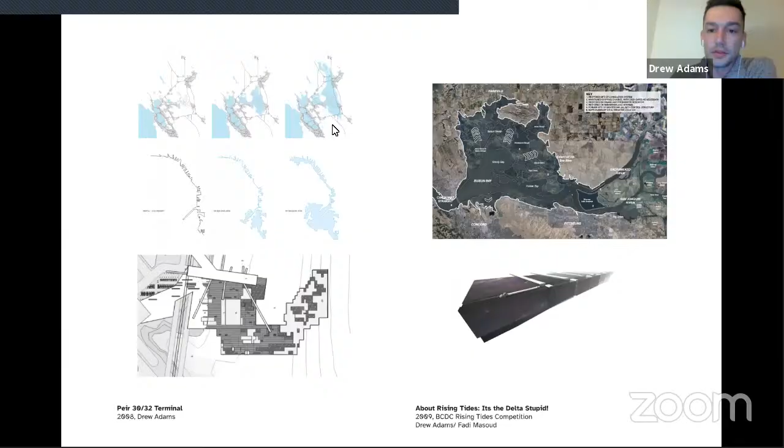This was one of a series of projects like this where work was happening in studio, and either in collaboration or independently, I was looking at leveraging these to keep exploring these ideas and use competitions to push development of graphic skills and skills working on project narratives. This work, to my surprise, quickly started getting published and didn't hurt in terms of getting summer jobs.

What was also something that stood out is at the time, Ian Chodikoff, then editor of Canadian Architect, had remarked during a presentation he was giving that often the editors and writers of these publications were looking for things to write about, and he had encouraged us to write out.

A number of these publications and others resulted from that, including the one in the middle where I had written to Christopher Hume of the Toronto Star, challenging a few things he wrote about the ability to fix the suburbs. I found myself 2 days later on the receiving end of a phone call from him, and 2 days after that, with some of my work in the Star, and a lesson to be much more prepared if I'm going to write someone like that, to be able to answer questions on the spot and continue to substantiate my positions.

This lecture by Cameron Sinclair, editor of Architecture for Humanity, while I was a student, founder of Architecture for Humanity and editor of the book Design Like You Give a Damn, left a fairly significant imprint on me. He delivered it at OCAD on when being sustainable is a matter of survival.

This lecture happened at the time the housing market was collapsing in the US, followed by the global recession. I spent the next several semesters at Daniels co-opting my studio assignments to focus them towards my own interests, building up to my thesis looking at the suburbs, zoning, and low-rise high-density housing typologies. Sorry for these things jumping on the screen, it's the Zoom controls popping in.

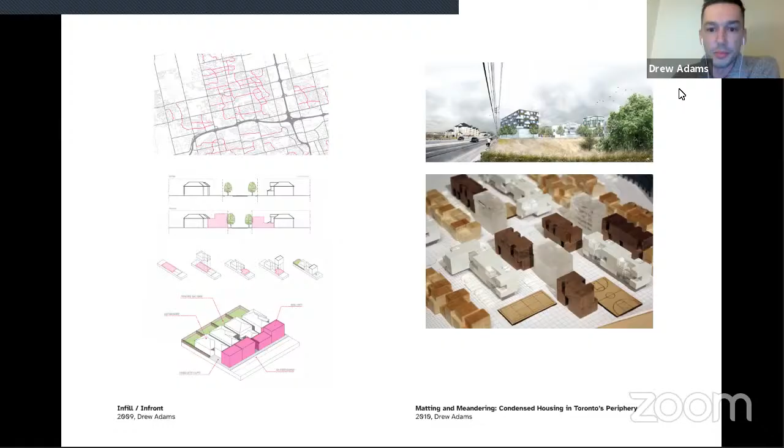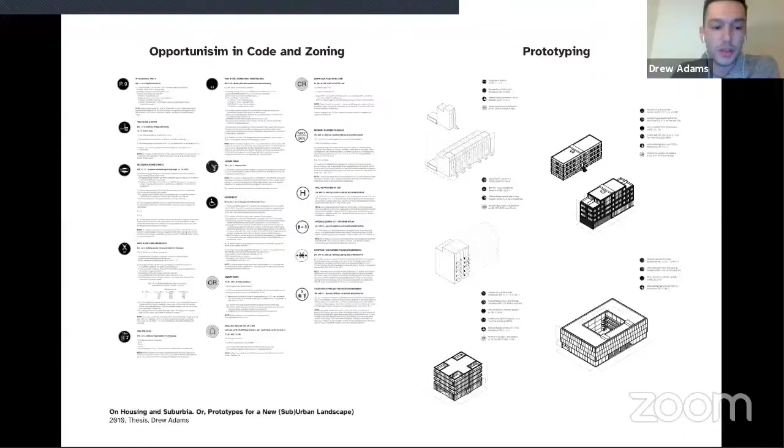This work in studio started to feed into my thesis work, looking at opportunism in the zoning and building codes to inform development of a series of loopholes, essentially, to inform development of a series of housing prototypes targeting areas of the city often cast aside as undevelopable for lack of sufficient performance. On the left, working on proof of concepts. On the right, starting to deploy these along my 6-kilometer long thesis site.

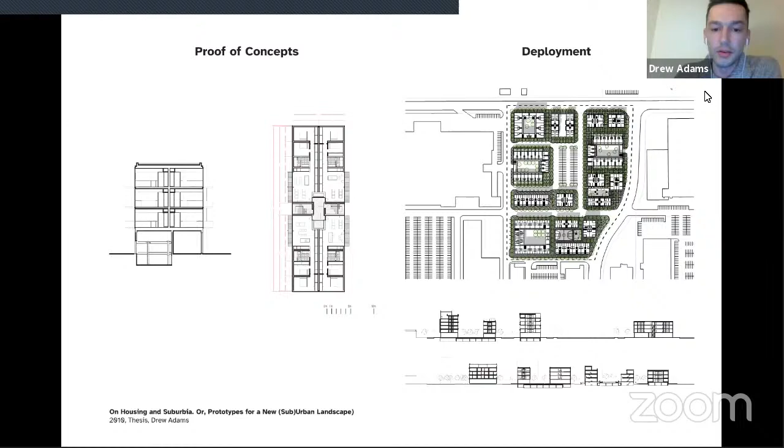It was a corridor site, so along it and adjacent to it, scaling that up to the regional scale of the Toronto area, looking specifically at these pink areas and essentially everything outside of the downtown core, but these pink areas specifically as sites for low-rise high-density intensification.

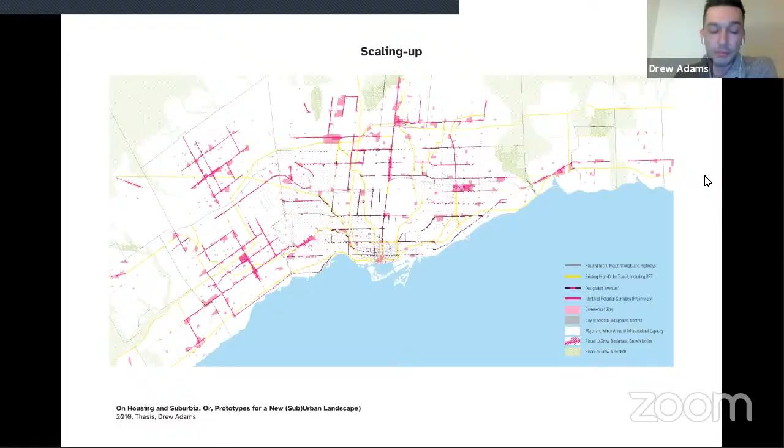In doing this work, what I was able to project and forecast at the densities through testing was that you could build out all of these sites and accommodate all the future projected population growth at the time for Ontario and Places to Grow without building anything more than a 6-story building, recognizing that we're still going to build condos like we always do at the same time.

After graduating Daniels, I joined Baird Sampson Neuert Architects, worked on quite a number of different projects, but in particular, this one on the left is one that left a mark on me.

It is a demonstration, a carbon neutral demonstration housing project in Yellowknife that we did a big design report on. I had the opportunity to fly up a few times.

And while working that, I was simultaneously working with a few friends on this competition entry on the right for net zero affordable housing in San Francisco, proposing a scheme that was 85% less energy than typical, 90% less water use through water reuse on site, and that was proposed as a 13-story skip-stop hybrid mass timber building that we ended up being one of the winners in.

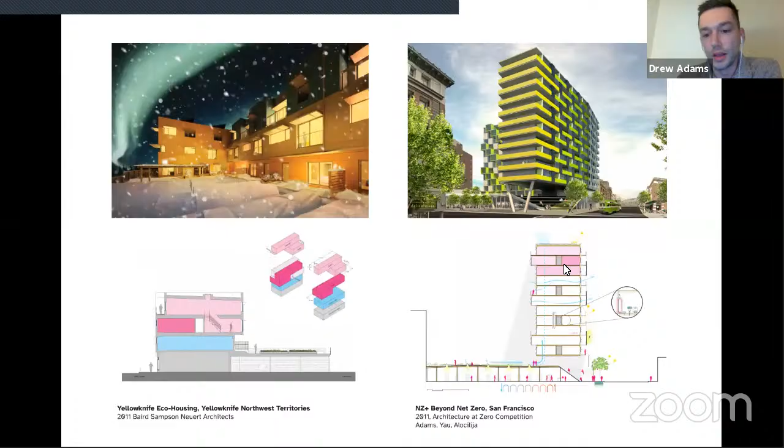After my time at Baird Sampson Neuert, I joined LGA Architectural Partners almost 8 years ago now, and found myself on the design team for this project, Eva's Phoenix, which is a 50-bed youth transitional housing center downtown, for the organization Eva's Initiatives, which is a fantastic organization and highly recommend you all look up.

This project is an existing waterworks warehouse that the City of Toronto owned. It was, at the time, underutilized and given over for Eva's, and then also the remainder of it to be redeveloped. The project intentionally was discrete from the street, not to announce the program contained within.

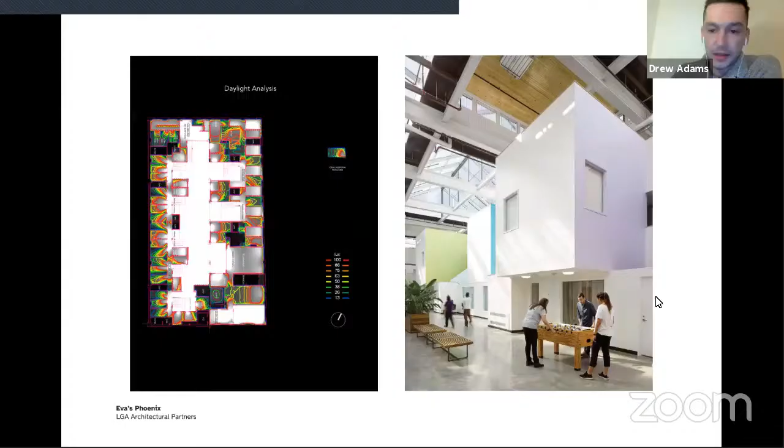As we developed this project, what you start to see here is these kind of semi-public street stoop conditions at the periphery of this kind of street condition.

This kind of crafting and attention to these transitions is critical for the project in allowing the youth to choose their level of participation on any given day in the shared collective life of the building.

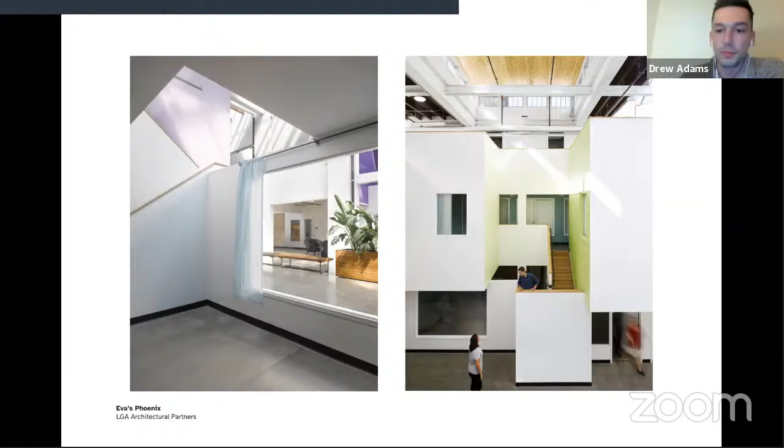There's a lot more about how this project was formed that you can find online by Googling, or I invite you to reach out to me. I'm not going to get into much more details on many of the projects I'll talk about.

But what this project kind of drives home in my mind is that the fundamental questions about housing today are not about height restrictions or zoning changes. Important as these questions can be, the core issues are what and whom housing is for, whom it oppresses and whom it empowers. And this is what Dave Madden and Peter Marcuse write in Defense of Housing.

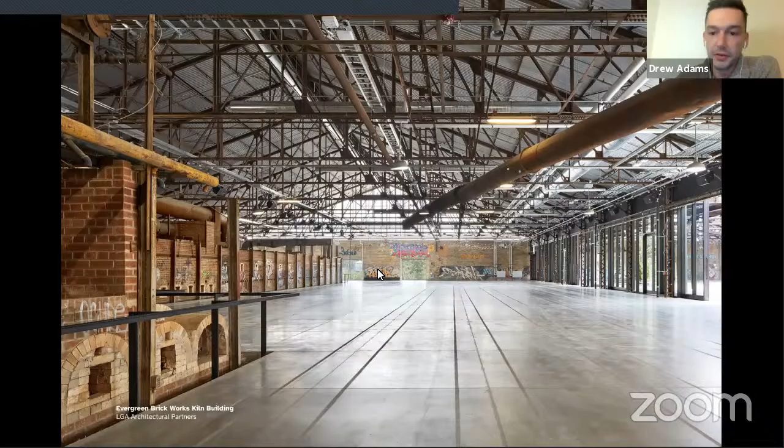One of the next major buildings along my career path was the Evergreen Brick Works Kiln Building, the largest building on the Evergreen site. It was left open air, unconditioned, exposed to the weather since the site was redeveloped. This is the space built out afterwards. The floor was raised, with minimal intervention at the edge using handrails, and a lot of infrastructure to enclose the building.

We really looked at a restrained intervention approach, with very small incisions in some of the existing fabric but very minimal demolition, and fine-tuned details between the new floor and the kilns. You can see heritage interpretation with steel inlays picking up the rails that were in the floor before, across to a new curtain wall with 12-foot by 12-foot sliding sections that allow seamlessness between the courtyard and the kiln building, which was formerly about 18 inches to 2 feet lower than the courtyard.

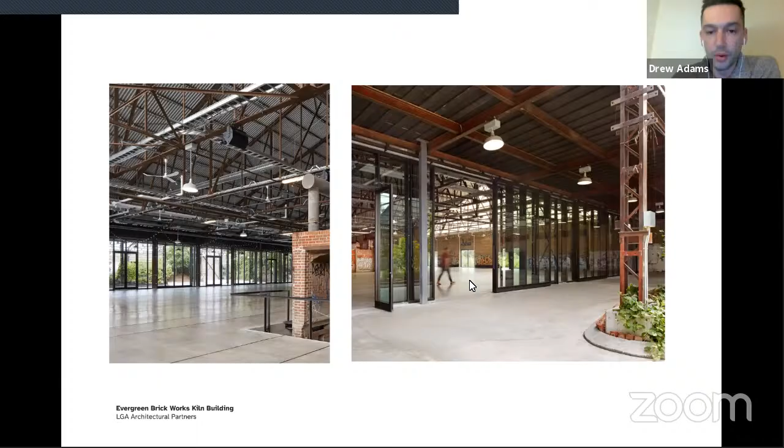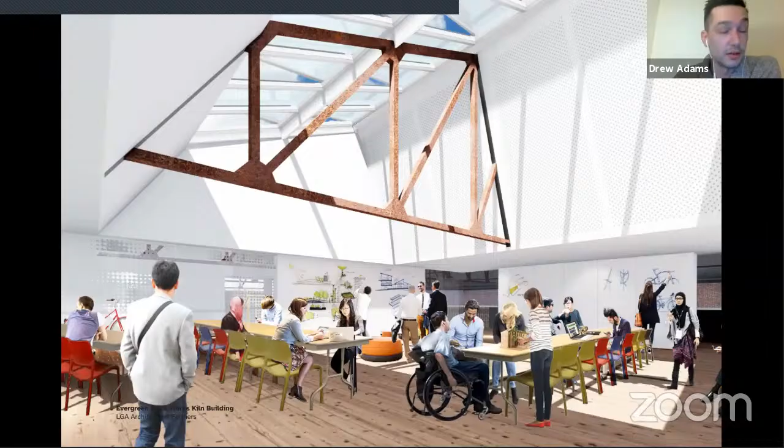The building approach is premised on in-floor radiant heating and cooling, driving an idea to affect people's perception of temperature and comfort, as opposed to a precise reading on the thermostat. This is supported by solar thermal panels on the roof connected to geothermal loops in the ground, which makes the building roughly 97% carbon neutral.

Through the renovation process, we avoided roughly 50% of the carbon emissions compared to building this with all new materials.

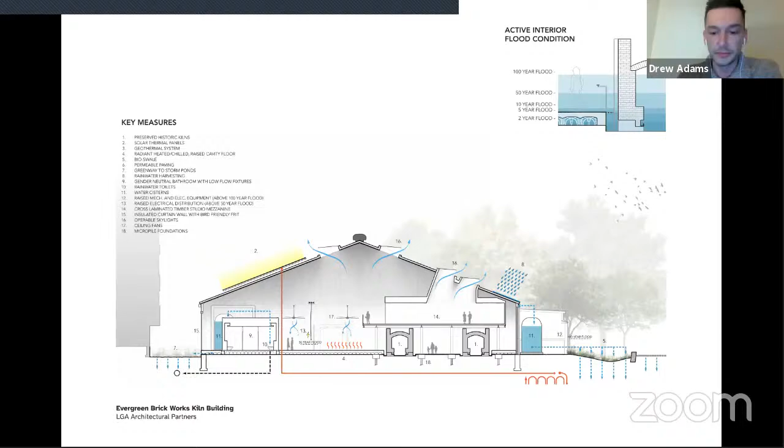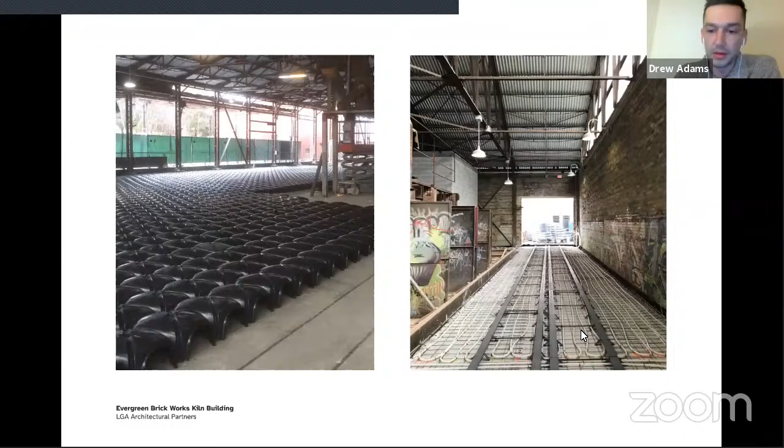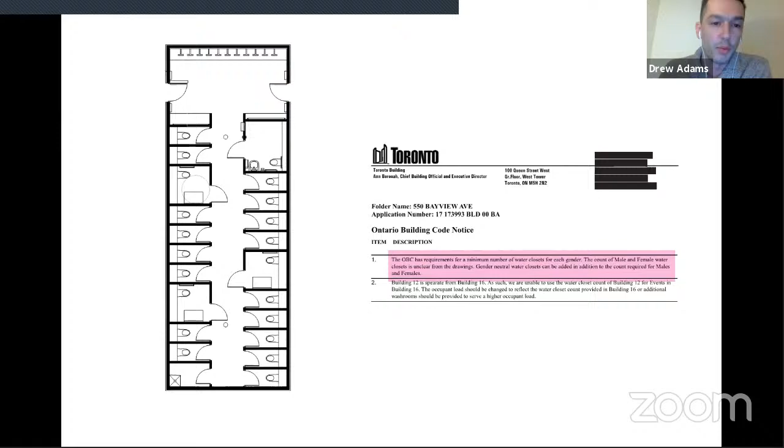One notable thing about this building was this bathroom, which didn't seem so controversial to us at the time, but the building department took a big issue with it. Specifically, it's 21 toilets in an all-gender washroom configuration, where every toilet has floor-to-ceiling solid walls, hollow metal doors, deadbolts, and everyone shares a sink. The building department responded by saying we could do this, but not until we provided all the segregated male and female washrooms they perceived to be required first. We had a long conversation about what was explicitly allowed or explicitly prohibited, and in the end, we got this built.

What it underscored for me is the pervasiveness of a variety of barriers that are institutionalized in many ways. Responding to this, I took it upon myself to submit a change to the Ontario Building Code, which anybody can do, to write an extra line for how you can calculate bathroom provisions.

I take no credit for this myself. I stood on the shoulders of Joel Sanders, Susan Stryker, Terry Kogan, and their work through the fantastic organization Stalled!, a US-based advocacy group on building code changes. They were instrumental in changing the International Building Code, and the work I did also built off of code changes done in the Vancouver Code. The reference document Design for Inclusivity, by Hughes Condon Marler from Vancouver, is also a great resource for designing this type of multi-user washroom or all-gender change room.

What this drives home for all of us as designers is to recognize that, for better or worse, the people who design the touch points of society determine who can participate and who's left out, often unwittingly, as Kat Holmes writes in Mismatch: How Inclusion Shapes Design. She goes on to say we must broaden our definition of design and designers, test our assumptions about human beings, wonder who we are excluding, and allow the answers to change our solutions. Above all, we must acknowledge how much we don't know about inclusion, since the cycle of exclusion culminates with the solutions we introduce into the world.

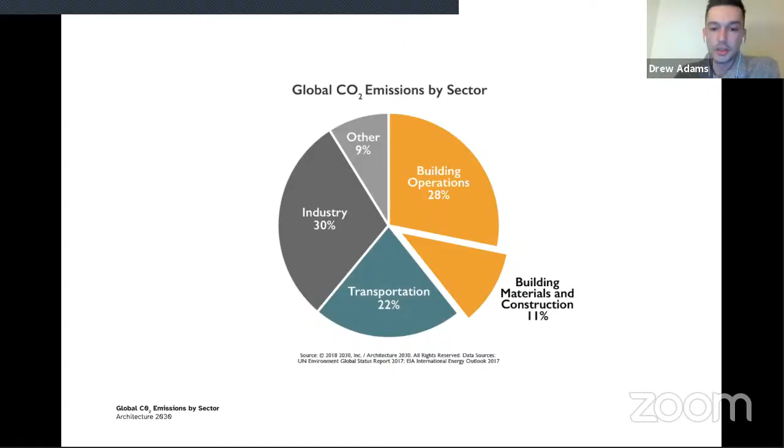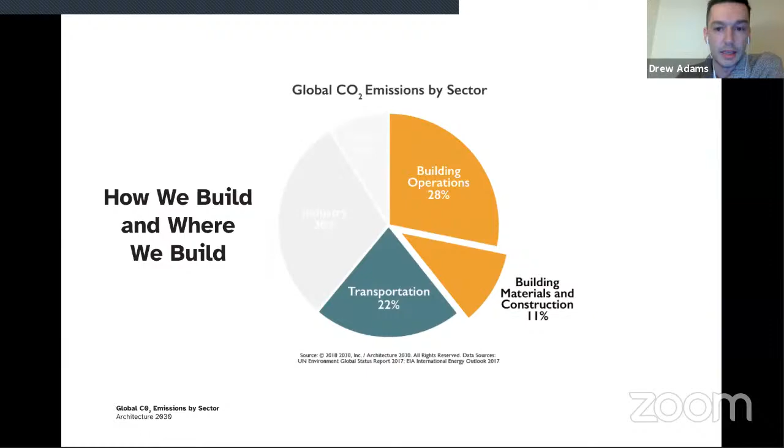The World Health Organization says that climate change is the greatest threat to global health in the 21st century. They wrote this prior to COVID, so this may be a little bit different now, but it's still a really significant point. More to the point, connecting these dots, how we build and where we build our work is one of the factors driving the greatest threat to global health in the 21st century.

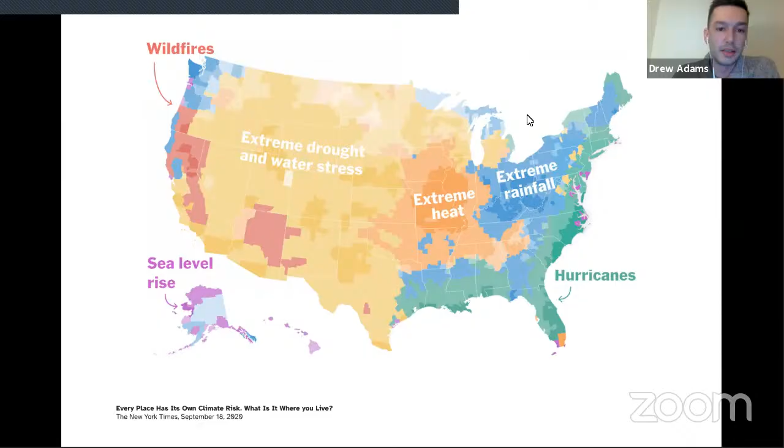This seems a little bit intangible, but we can start to look at an image like this from the New York Times, that this is specifically manifesting in things like wildfire, extreme drought, extreme heat, extreme rainfall, hurricane events, and sea level rise. Looking at wildfires specifically, each year globally, between 260 and 600,000 people are dying from smoke from wildfires that is being driven in some part by climate change. This is in David Wallace-Wells' book, The Uninhabitable Earth. It's a fantastic read, a little bit frightening, but fantastic nonetheless.

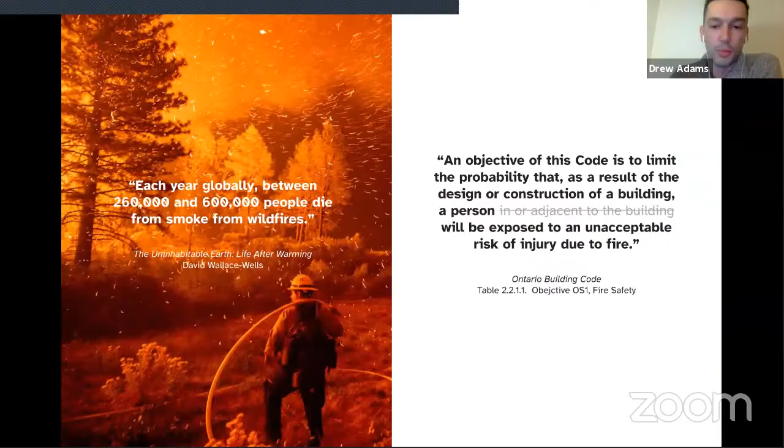Bringing this home, the Ontario Building Code has a series of objectives at the front, this being one of them: an objective of the code is to limit the probability that as a result of the design or construction of a building, a person will be exposed to an unacceptable risk of injury due to fire. I think we can strike the line in or adjacent to in this kind of context, but just understand that the building codes ought to be trying to combat this more than they are, which is a serious thing that we need to confront next with the policy documents we have.

A dozen or so of these objectives at the beginning of the building code specifically speak to 'in or adjacent to.' This one, interestingly, does not. An objective of the code is to limit the probability that as a result of the design or construction of a building, a person will be exposed to an unacceptable risk of illness.

Where that starts to come home is that we look at asthma being exacerbated by climate change. People are dying from it. Disease vectors are being altered. For instance, ticks have migrated north, and now Lyme disease is a problem in Ontario where it wasn't before. Heat stroke, heat waves, malnutrition due to crop failure, water scarcity issues are all being driven by this.

Either by action or inaction, through fault or ignorance, we've designed the world to behave exactly as it's behaving right now. It's what Mike Monteiro writes in Ruined by Design: How Designers Destroyed the World and What We Can Do to Fix It. What's next?

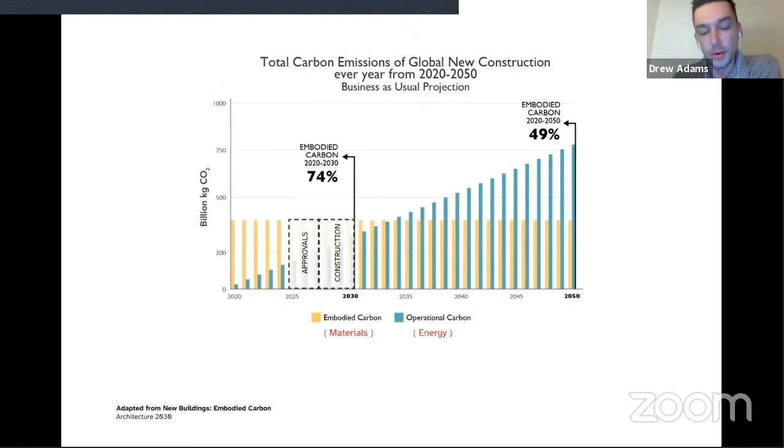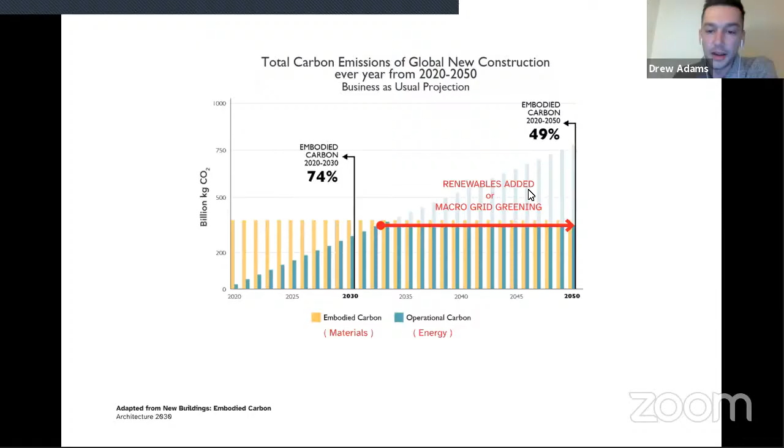Importantly, while the material emissions are set, they're irreversible. Once you cast the concrete, the impact of that is done. The energy emissions we can still alter into the future, either by adding renewables or looking at macro grid greening strategies. Where are these emissions coming from, and how is this shaping our buildings?

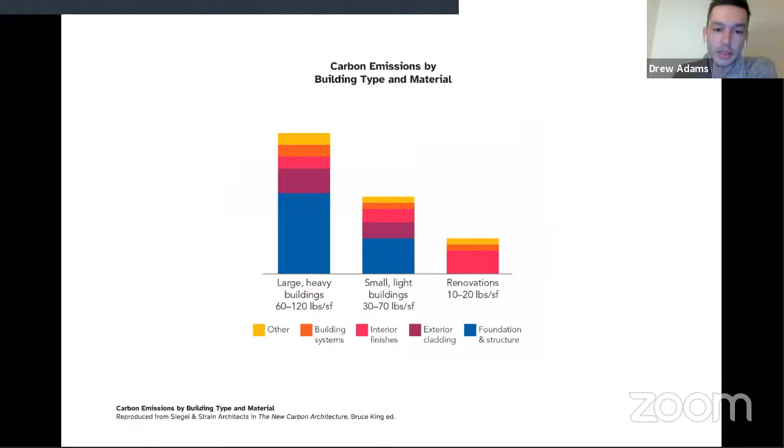On the left here, large heavy buildings. In the middle, lighter footprint of small light buildings. This is fairly typical conditions, though every project is unique. Renovations, obviously, are much less on the right. But what is driving this are decisions on how we design our buildings in terms of foundation and structure, exterior cladding, and interior finishes, work that designers and architects have a huge degree of agency over.

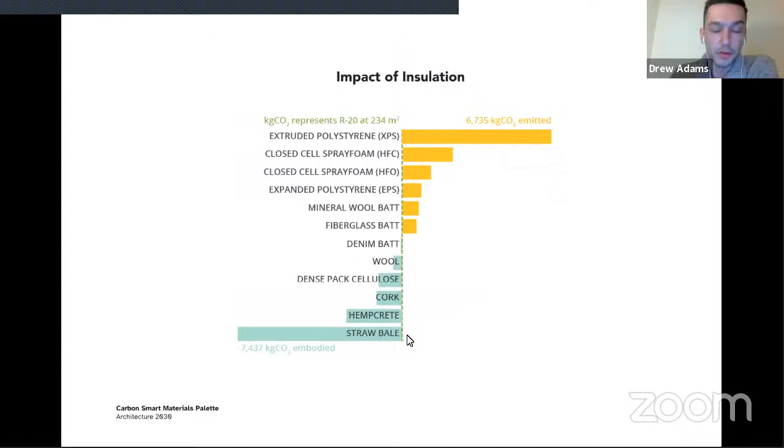We can choose extruded polystyrene insulation, or we can choose mineral batt insulation, which is roughly 22 times less impact for R-value. And that's not even getting into what might be cast aside as 'hippie' materials, like dense packed cellulose or straw bale construction, which start with a sequestering material footprint.

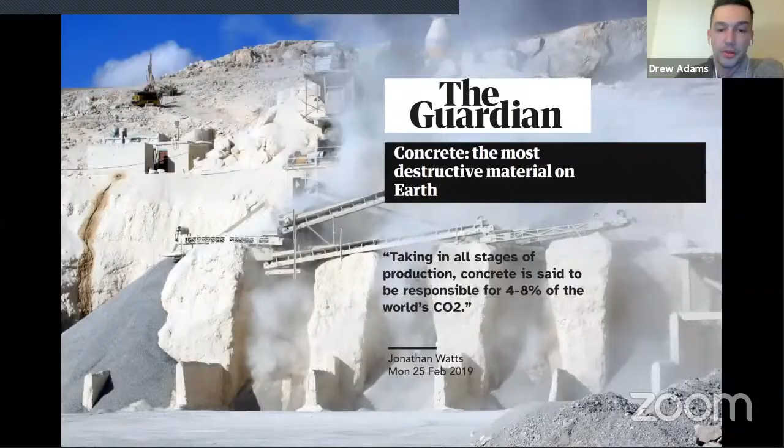We bluntly and blindly use concrete. It's said to be the most destructive material on Earth, responsible for emitting roughly 8% of the world's CO2. Tomorrow, on any project you're working on, you can use fly ash or slag in the mix design to reduce that impact, and use displacement forms like bubble deck, hollow core, or others to mitigate the impact of how you deploy it.

Steve Webb of Webb Yates, an engineer in London, really drives this home: it's absolutely outrageous that an architect goes out and buys locally grown tomatoes at the supermarket, gets on their bike to work, thinks they're an environmentally conscious person, while designing a concrete or steel frame building, and I would add, one that's often wrapped in petrochemical insulation.

I would also add I think the same goes for arriving to studio to do the same thing in school. I'd bring this home with an example from one building I'm working on, one of many in my career. For the below grade insulation, which we're doing more of than typical because we're looking to get a high energy performance outcome, the difference between choosing extruded polystyrene insulation or rock wool is roughly 130 tons of carbon. That's roughly equivalent, if I've done my math right, to me becoming a vegetarian tomorrow for the rest of my life and my next two lifetimes.

That one-third of the insulation of one small building I'm working on is equivalent to that personal choice. It really drives home that we need to be much more responsible in our decision-making, in our design, as we are in other aspects of our life.

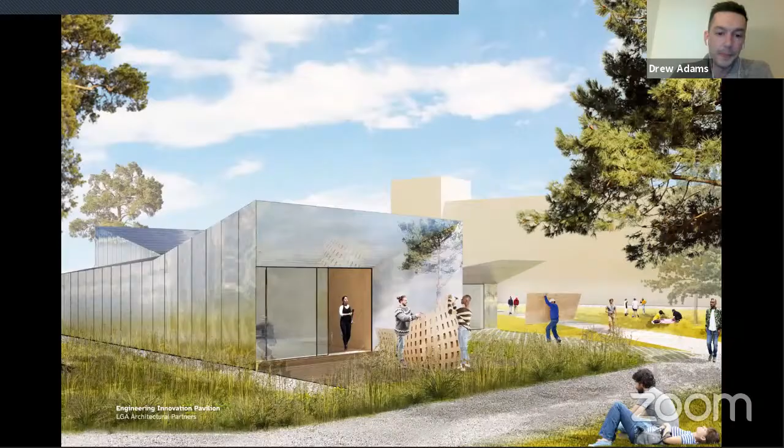Some of the work I've been involved in lately includes this engineering innovation pavilion. It is a mass timber building, proposed with wood fiber insulation. It has a carbon neutral mechanical heating and cooling system. It's on steel pile foundations and sequesters 40 tons of carbon from its construction, and emits nothing in its heating and cooling.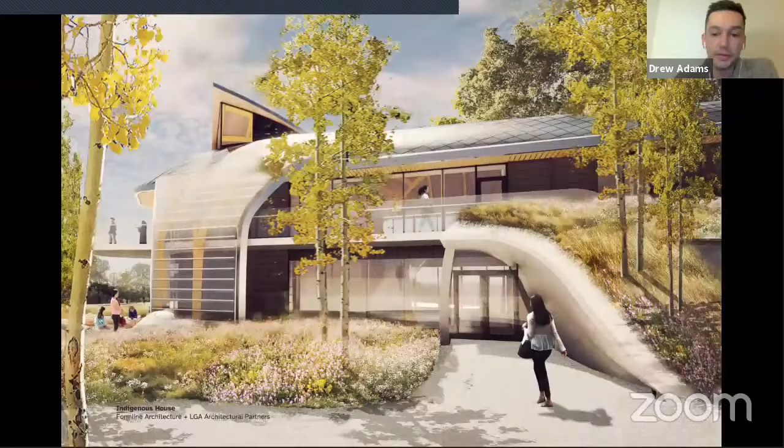This project is Indigenous House at the University of Toronto Scarborough campus. It is a collaboration between LGA and Formline Architecture and Alfred Waugh. The lead architect for this from Formline will be speaking at U of T in March, and I encourage everyone to listen. This project is a carbon neutral, passive house equivalent building, also looking at a variety of natural building materials to lower its footprint.

This project here again pursues similar ideas. It's an ecocultural gathering place. It is looking at mass timber, low impact insulation choices, and other natural materials.

I think it might be easy to say these are a product of unique project circumstances, and I've certainly had some great opportunities with great clients. But on each of these projects, I've actively tried to push these projects and clients one step past their comfort zone. In some ways, if a client comes to me and says I want to do 25% better than energy code for my building to get funding, part of the conversation becomes, well, what about passive house? What if we go one step further and take it to passive house?

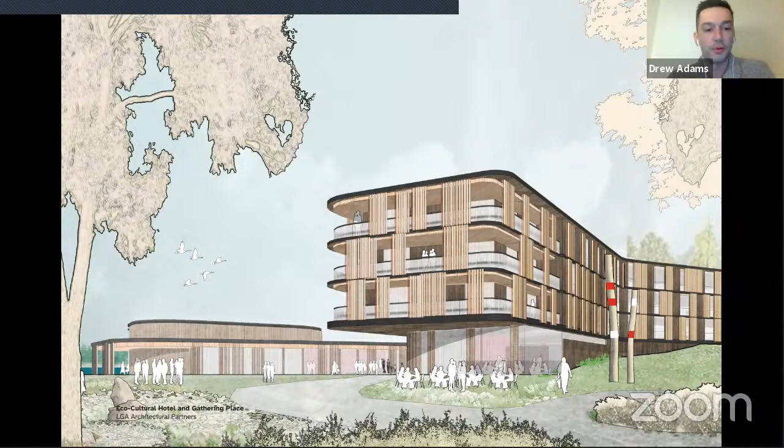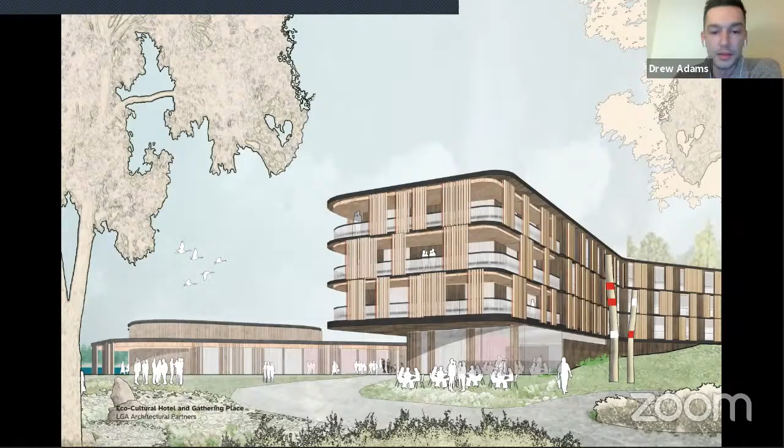Or if someone comes to me and says, I want to do this carbon neutral pavilion building, the conversation starts to be, well, what about carbon negative? Can we push it one step further? I think in order to do this, we have to be informed. We have to have done our research and homework beforehand, and it means making a lot of phone calls to suppliers, other designers, to builders. I would speculate that I'm making calls like that every other week at least, to be able to make these kinds of propositions.

Recently, late last year, I took another opportunity to look at my thesis through a new lens on embodied carbon. This work had concluded by speculating that we could accommodate all of the population growth forecasts for the region at the time in buildings not more than 6 stories. I thought, what choice did that lay out through this new embodied carbon lens?

I would end by reframing the quote I opened with, the Buckminster Fuller one, that the success or failure of this planet and of human beings depended on how I am, what I do. How would you be, what would you do? Because that's what I see as what's next. Thank you.